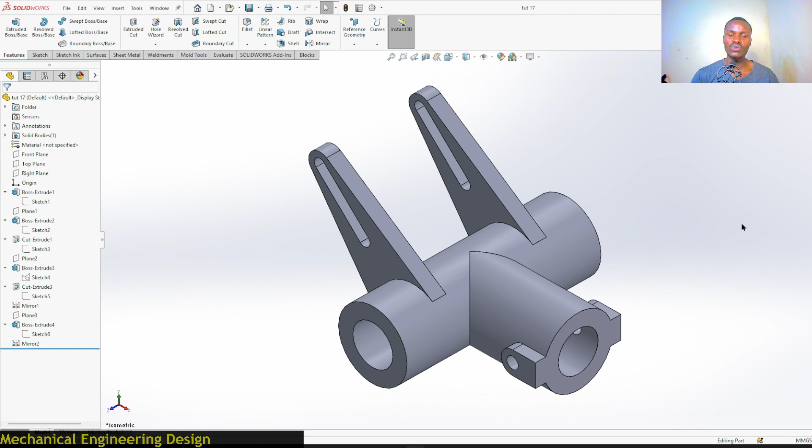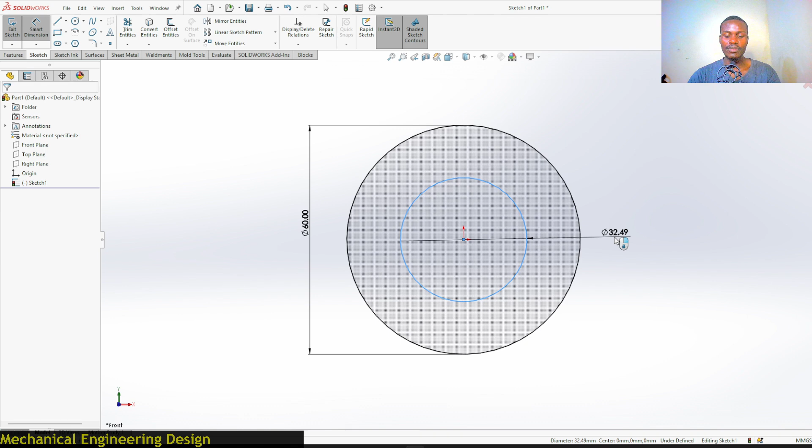Let's get started. Create a new part, do the sketch from front plane, and start with a circle from origin. Sketch two concentric circles, then smart dimension: the outer circle is 60 millimeters and the inner circle is 35 millimeters. Go to features and extrude. Extrusion distance is 170 millimeters, direction mid plane, then okay.

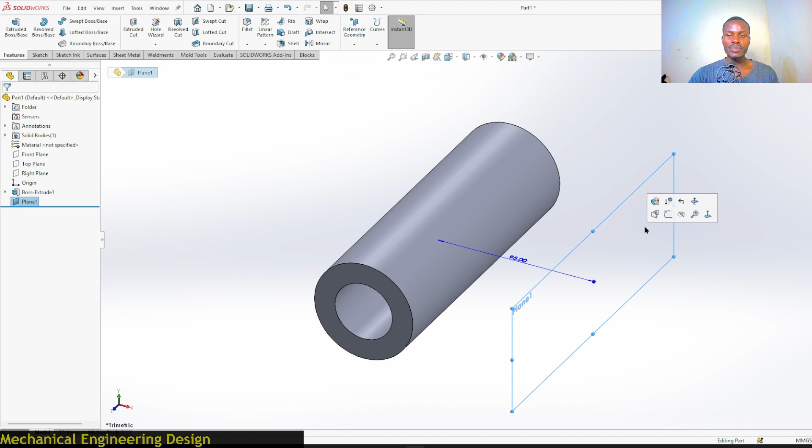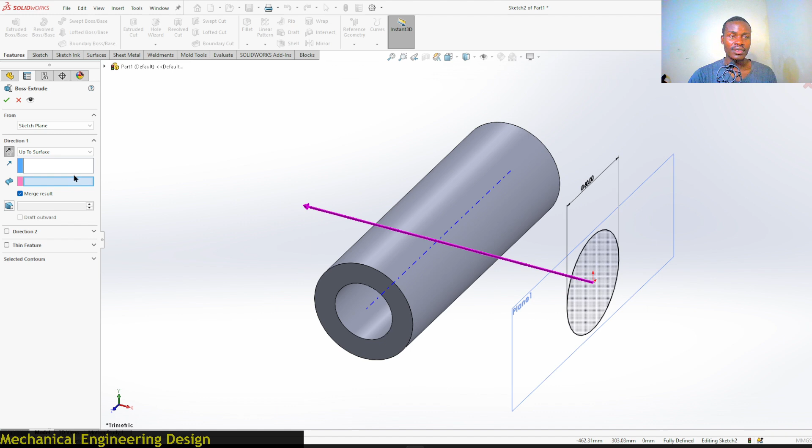Our next sketch we'll do on a new plane, which we need to create. First reference geometry is right plane, distance 95 millimeters. We'll sketch on this plane, draw circle from origin, smart dimension with a diameter of 60 millimeters, then extrude. Direction: up to surface, and select this surface. Okay.

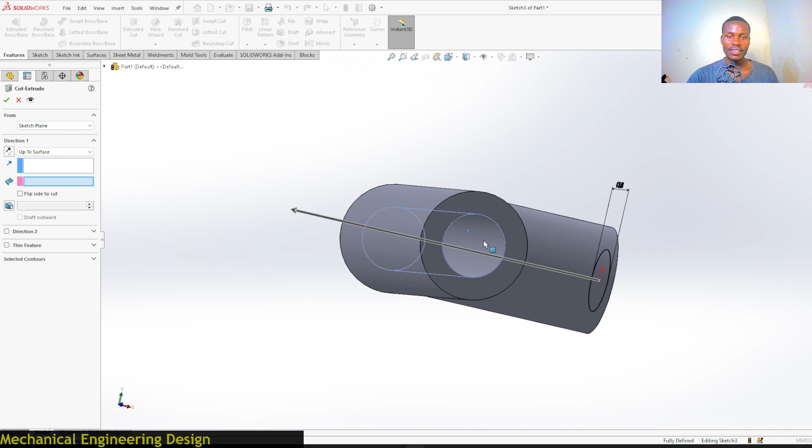We can hide this plane and sketch on this face. Pick circle again from origin, diameter of 35 millimeters. Go to extrude cut, and this time extrude up to the inner surface. Then okay, this is how it will look.

Now we'll create another feature and extrude to this surface. This time we'll also need another plane. Our first reference is front plane, and we give a distance of 37.5 millimeters, then okay.

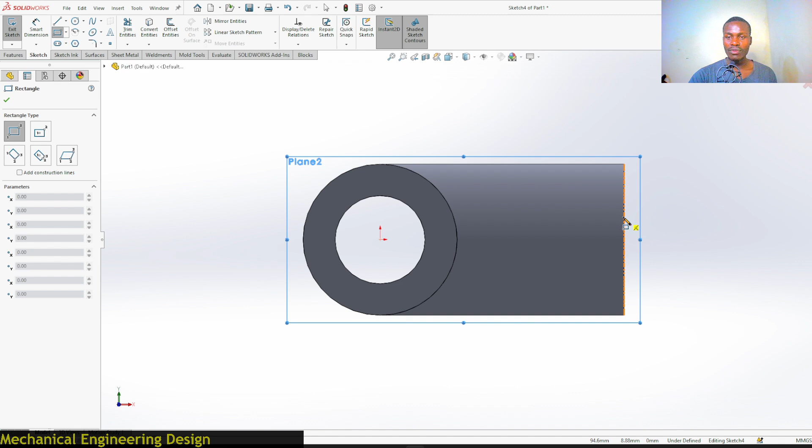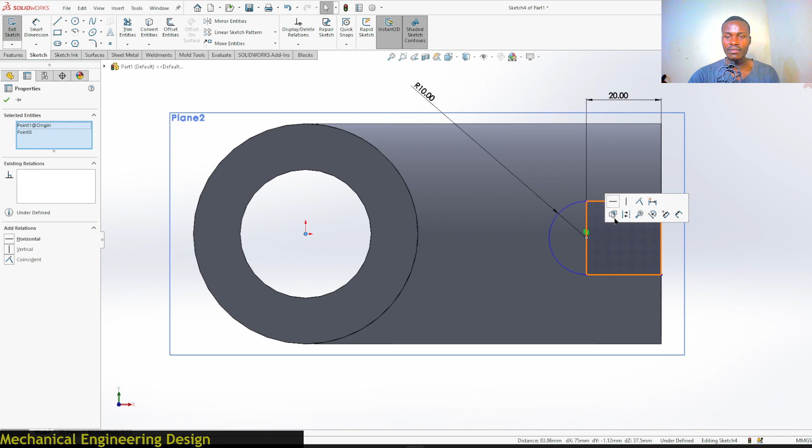Sketch on this plane, pick corner rectangle from this edge, then pick center point arc from the midpoint of this line. Start from this corner to that corner. Smart dimension: this distance is 20 millimeters, and diameter of this arc is 20, so radius will be 10 millimeters. We'll give a relation to complete our sketch: from origin, identify midpoint of this line and give horizontal relation. It's fully defined, and we can convert this line to construction geometry.

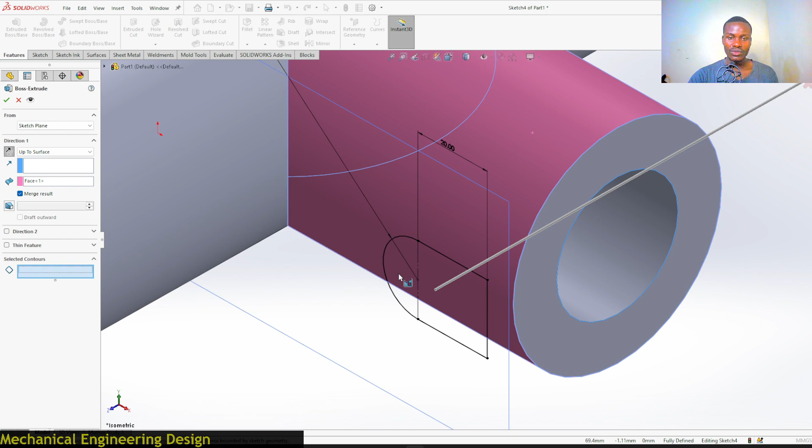Go to features and extrude, reverse direction, select this surface, and on contours select the two of them. We hide this plane again and sketch on this face.

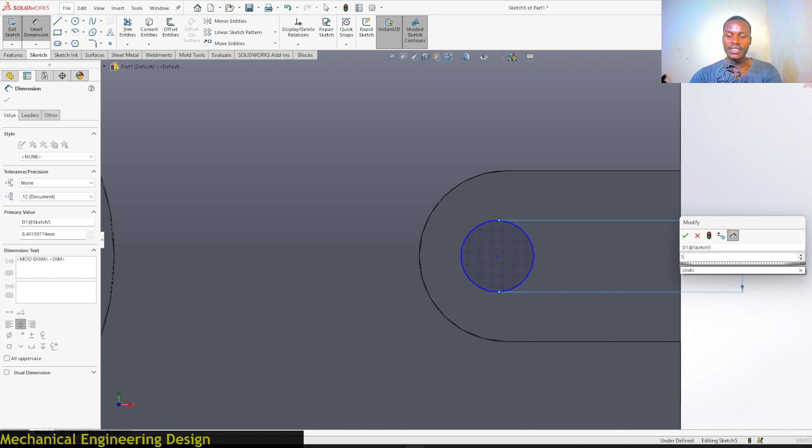In this exercise we are utilizing a lot of planes to simplify our process. Now pick circle, draw it anywhere on this face, and smart dimension: diameter is 10 millimeters. We can give relations: click on this arc, hold shift, click on circle, give concentric relations. It's fully defined. Go to extrude cut, select up to surface, and select this surface.

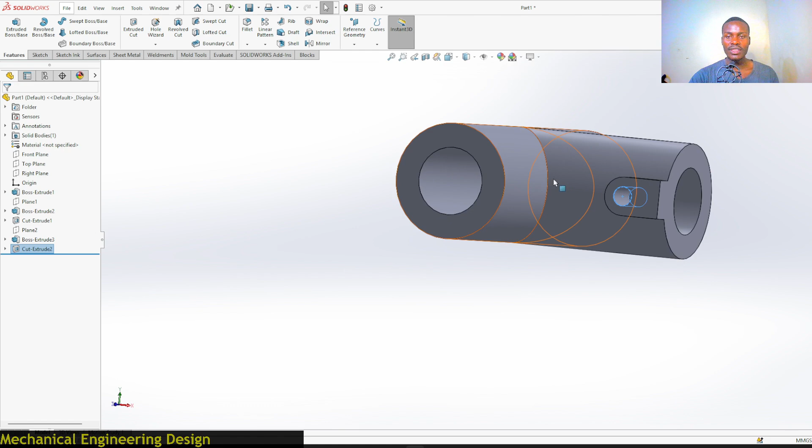So this hole will be threaded to act as a passage for the fastener to tighten the shaft that will be coming from this side.

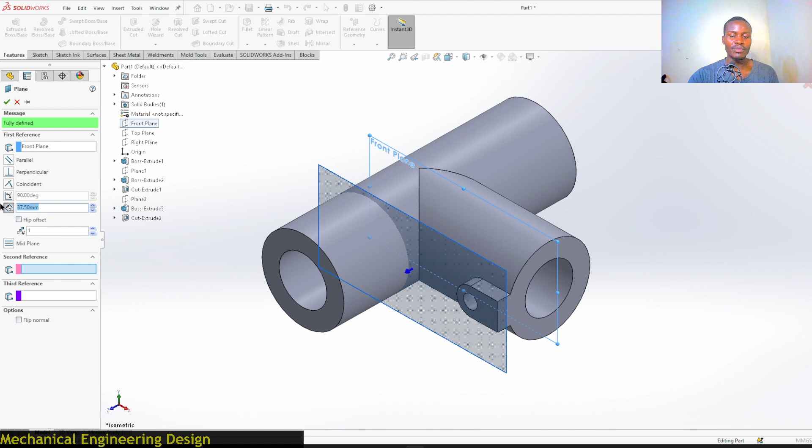We'll do the mirror, but before that we need to also create another feature here, then we can mirror both of them at the same time. So we create another plane. First reference is from front plane, and distance is 37.5 millimeters this time.

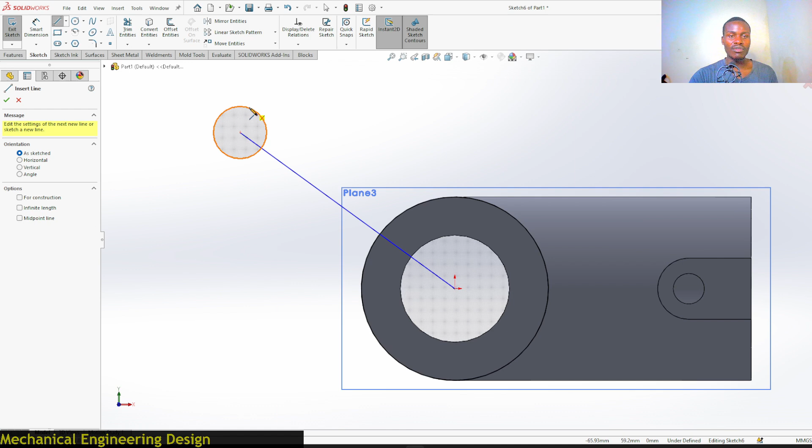Now we sketch: pick circle and sketch from here, go to convert entities and select the outer circle. Pick line from this origin to this center. Now pick line again from outer circle to this circle. Pick line again from outer circle to outer circle. Don't worry, we'll give relations.

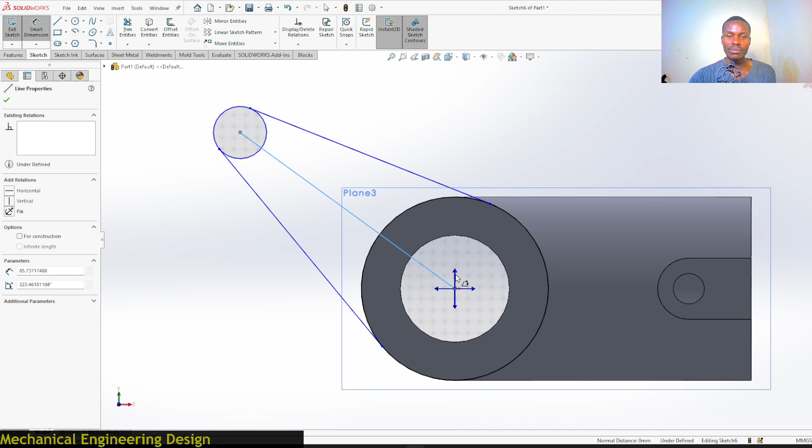Now we begin our smart dimension from origin to this line and rotate. It gives you an option of putting an angle, decided from either vertical or horizontal direction. We'll do it from vertical line, and this angle is 45. We can convert to construction geometry.

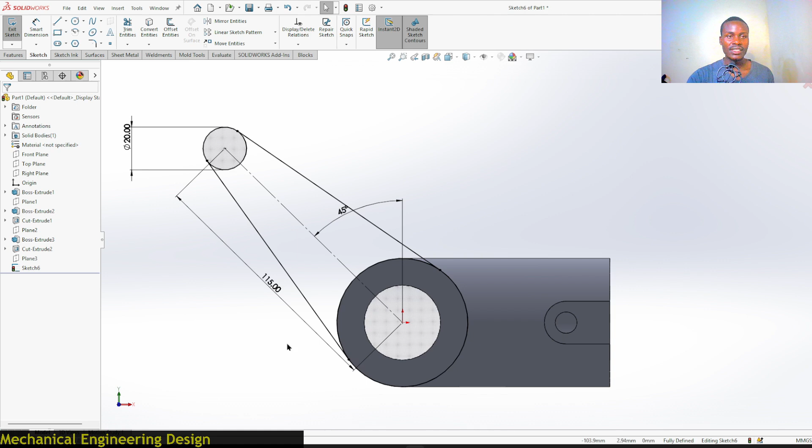Smart dimension: the outer circle has a diameter of 20 millimeters, and this straight distance is 115 millimeters. Our sketch is fully defined because these lines are tangential to both circles. Now click on this plane and hide it. We do the last thing, trimming excess lines. Ensure you don't trim this line, just trim the axis alone, and also trim this side. The outline is clear.

We go to features and extrude. Now give blind direction, distance of 10 millimeters, and then reverse.

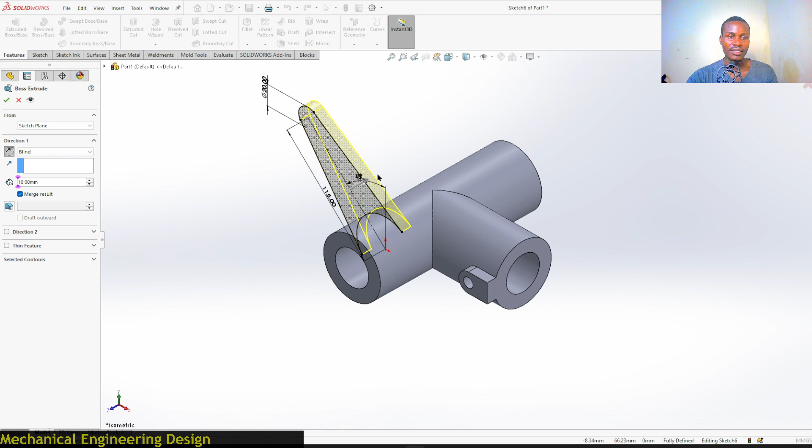There is one slot we'll sketch here before we do the mirror. Draw a circle here and another circle here. Draw a line from this point to this point. We'll also sketch a continuous line from this point to origin. Click on this line and this one and make them collinear. Now click on this circle and the outer arc, give concentric relations.

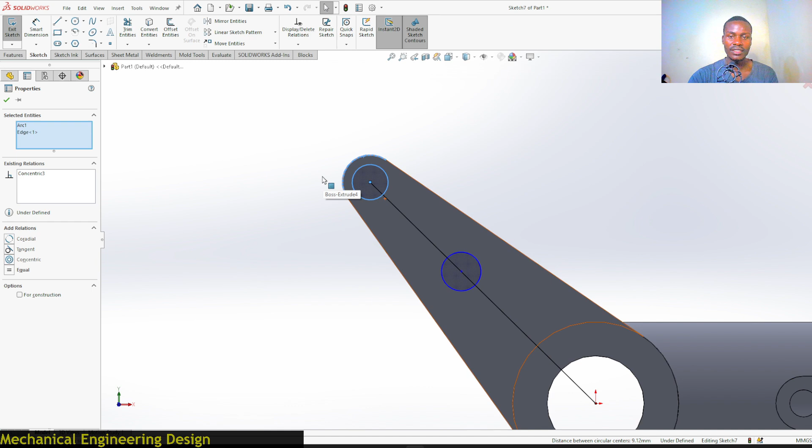The next option is to smart dimension: this diameter is 8 millimeters, and from this center is 50 millimeters. Now give equal relations to these circles. They are fully defined. Then we can convert these lines to construction geometry.

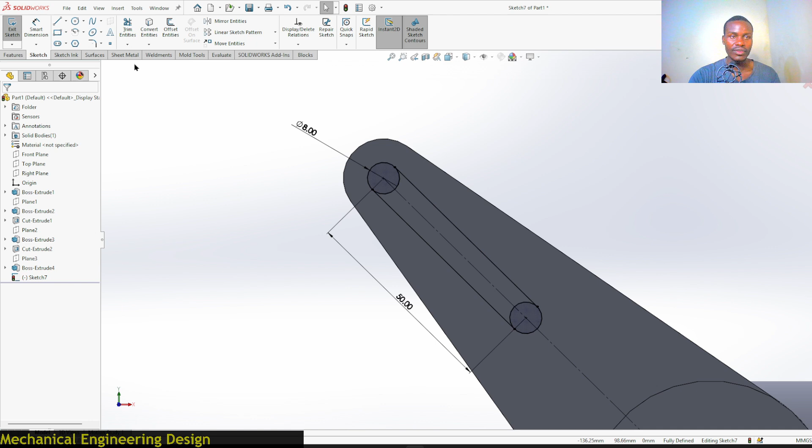Now we do sketch lines, tangential lines to the two circles. They are fully defined. Now trim this arc and also this side, and go ahead and extrude cut. Just click OK. Now look.

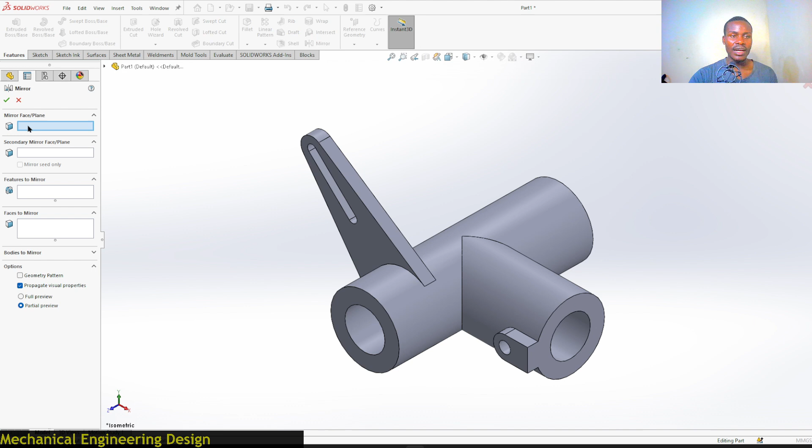Final option is to do the mirror for the two features. Go to features and select mirror. Our mirror plane will be front plane, and features to mirror will begin with this part, and then extrude cut, this one. We'll come to both the extrude feature and extrude cut, then OK. Simple.